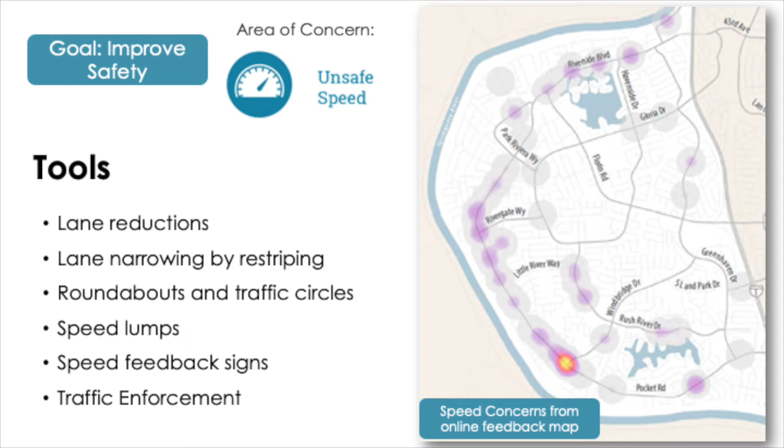I'd like to talk a bit more about lane reductions. They're one of our most effective tools to slow traffic and improve safety. The result is that drivers are less comfortable and less able to drive at high speeds. We heard from you that you've observed racing-type vehicle behavior and aggressive passing, especially on roads with 2 lanes in each direction. A lane reduction would reduce these instances of bad driver behavior and unsafe speeds.

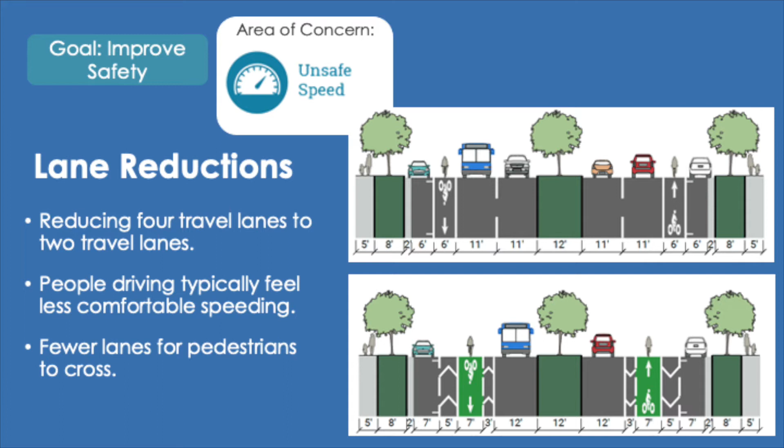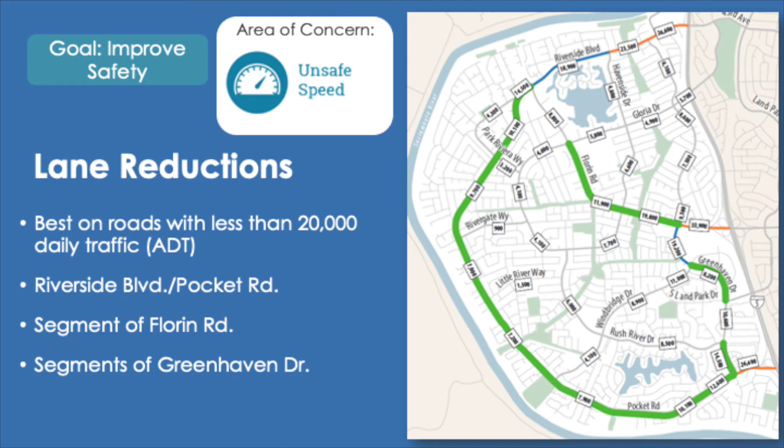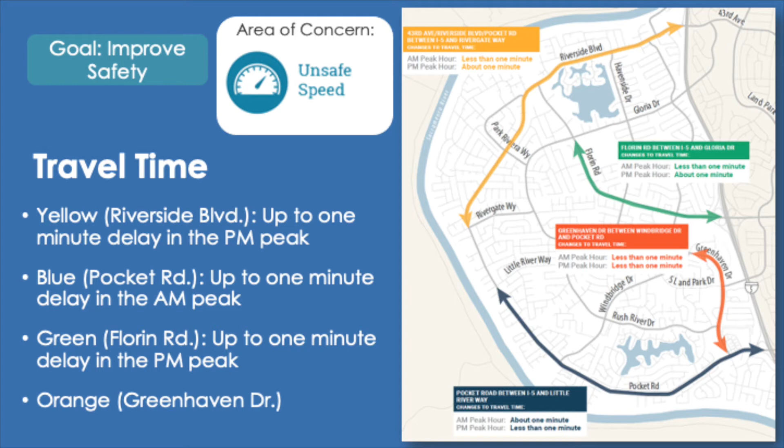You're muted, Leslie. Sorry, I muted myself for a second there.

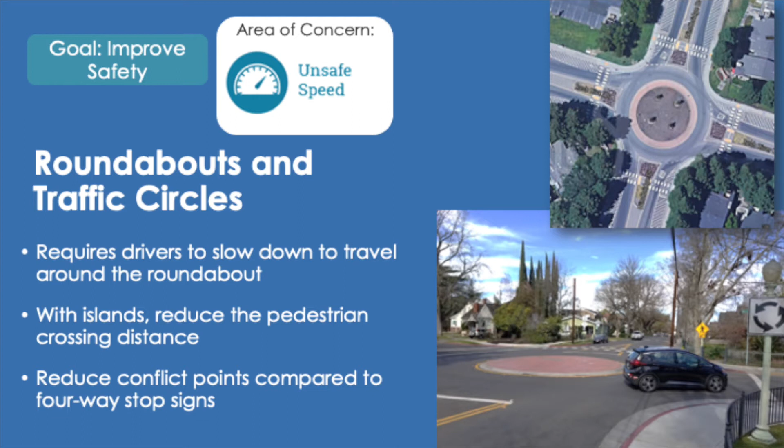One limitation to roundabouts and traffic circles is they physically require a lot of space. Shown in the lower image is a mini traffic circle similar to what we've put in other neighborhoods throughout the city of Sacramento, and similar to what would potentially be appropriate in your neighborhood as well.

Something else we know about traffic circles is that roundabouts and traffic circles work best when grouped together. We've identified two groupings where they could be used to slow speeds: on Rivergate Way, Pocket Road, and on Rush River Drive, where we have all those senior facilities. As I mentioned before, seniors are our most vulnerable neighbors, and these could reduce speeds to reduce the risk for our senior neighbors.

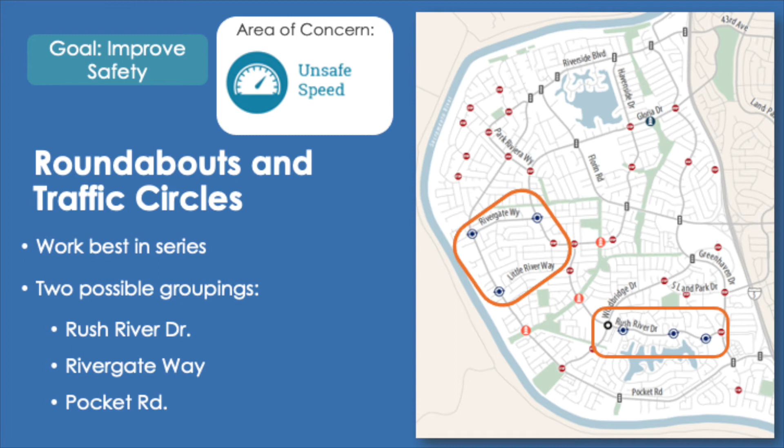Additionally, another tool we can use to improve safety by slowing drivers down is speed lumps. I'm sure you're familiar with how speed lumps work, but there are some limitations. We can only place speed lumps on two-lane residential roadways with posted speeds under 30 miles per hour.

We've identified a few locations appropriate for speed lumps around schools and where we've heard your concerns about cut-through traffic. We heard early in our outreach that cut-through traffic is a major concern, which is why we're looking at the neighborhood holistically rather than just at one road at a time.

With any speed lumps we install, we work with regional transit and the fire department to make sure their vehicles can still be accommodated and get over those bumps.

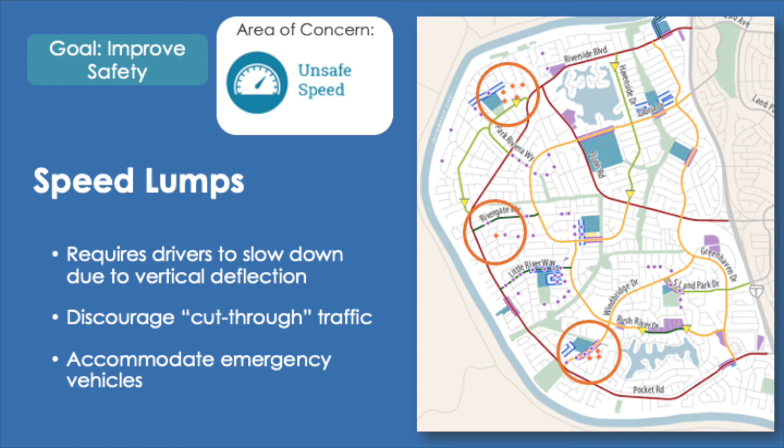Now it's time to go over tools related to improving access to destinations, especially for people walking and biking. During our community engagement, we heard that many of you would like to walk children to school or bike to the grocery store, or use active transportation more frequently for other daily trips, but right now it's not always comfortable to do so.

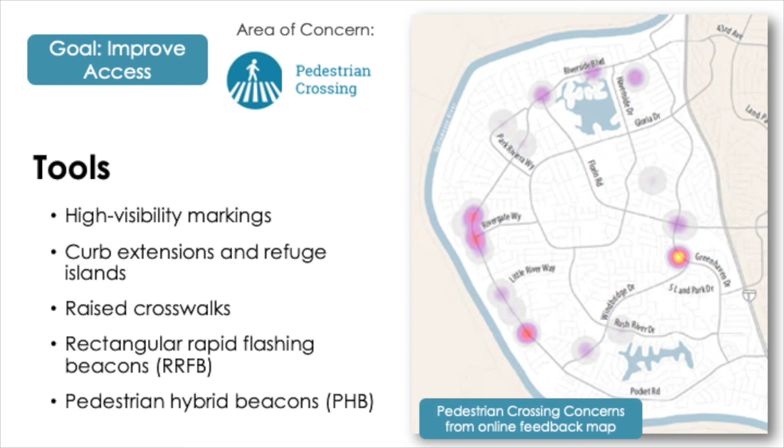Tools we have to improve crossings include high visibility crosswalk markings to make the crosswalks and the people using them stand out to drivers, curb extensions and refuge islands that shorten the distance to cross from sidewalk to sidewalk, and raised crosswalks, which are marked with paint but also raised to the height of the sidewalk, so even when no one's using it, that's a cue for motorists to slow down.

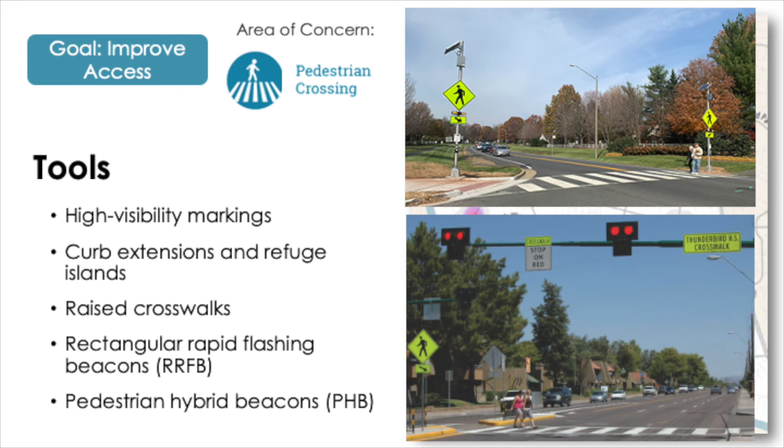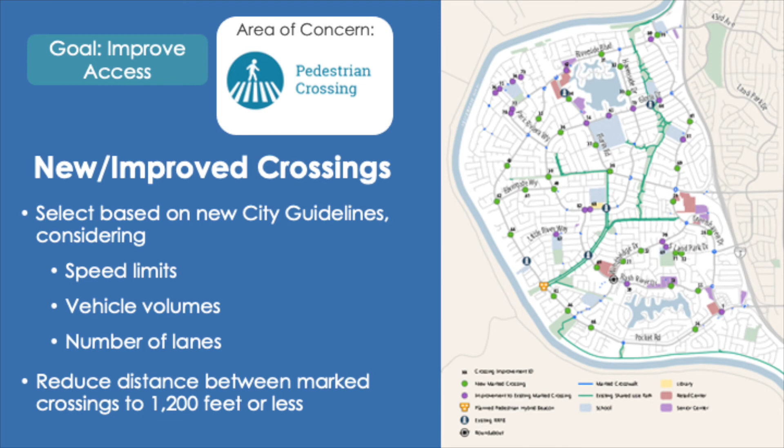To create this map, we also considered key destinations like bus stops, schools, and shopping centers. The purple dots show existing crosswalks that could be improved, and the green dots are locations for potential new crosswalks. As I mentioned before, right now in some locations it's over a mile between crossings, and ideally we'll get the distance down to 1,200 feet or less.

Another way that we can make travel more comfortable, easier, and safer to get around the neighborhood is to identify and fill gaps in the bikeway network. There are many types of bikeways with various levels of comfort for the user. The standard on-street bike lane that requires a person to ride directly adjacent to traffic isn't always comfortable, especially for children or less experienced riders.

Buffered bike lanes include a painted buffer to add space between the person on a bike and moving vehicles, and buffers can also be added on the other side of the bike lane to avoid what we call the door zone. Protected bike lanes use vertical separation, such as a post or a parked car, to add physical separation between the person on a bike and the moving vehicles.

And neighborhood bikeways and trails, I'm sure you're familiar with these. They're very well used throughout the pocket. But we did identify some gaps in that network that we noticed in our existing conditions research, and we also heard through our community outreach where those gaps are.

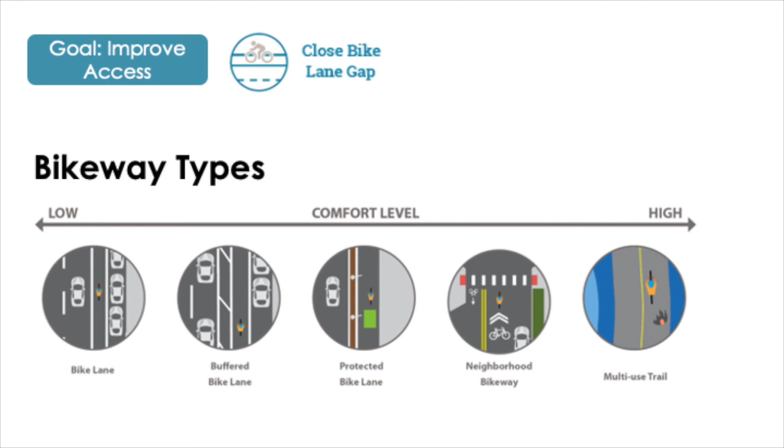Some considerations that we use are: the width of a street doesn't always include space for a buffered or a separated bikeway. The speed and number of vehicles greatly affects the comfort of a person on a bike, so lanes aren't always necessary on small residential streets. And also in areas with a lot of driveways, that vertical separation like a post or parking protected bikeway isn't always feasible because of the movements in and out of those driveways.

Here's one specific location where we learned there's a lot of challenges for people biking and walking, and that's crossing Greenhaven between Florin and Windbridge. As you'll see there, that sort of hot spot on the map shows that we heard a lot of concerns about this area. The Lake Crest Village Shopping Center is here on the east side of Greenhaven, and we heard that there's a lot of concern about people biking and walking directly across the street, mid-block, with no marked crossings, especially at the end of the canal path.

So an idea that we had to reduce this behavior is to add a traffic signal at Greenhaven and Secret River Drive, which is at the entrance to the shopping center. This way, people who are using that canal path can bike through the neighborhood and cross at the new traffic signal, or folks walking along the path or out of the neighborhood could walk up the sidewalk and cross at that traffic signal rather than running across the street mid-block, which we heard is a real concern.

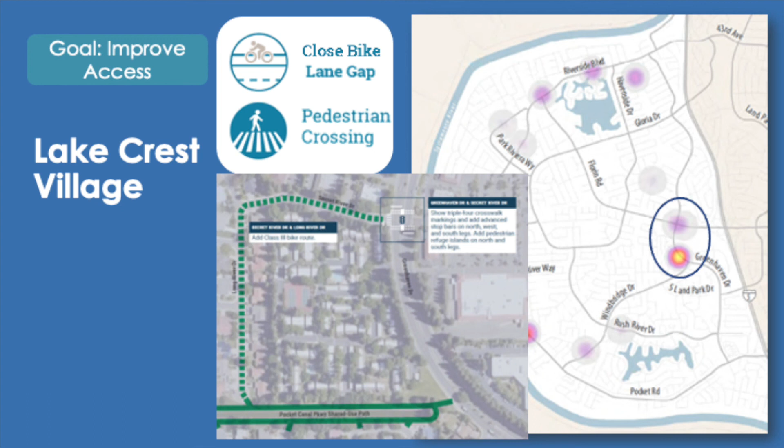There are also a number of additional ideas that we heard that don't really fall squarely into any of the categories we've talked about today, but will ultimately improve safety and mobility. Programs like these are funded in different ways, and some would require the support of schools, community groups, businesses, or other partners, but they're still important. These include educational campaigns about shared use path etiquette, bike or walk to school days, or walking school buses, but also adding lighting and wayfinding signage could really help be assets to the community and help people get around safely.

So looking at next steps, we will take your comments, as everyone has mentioned several times, for the next two weeks. We'll consider all of that input, compile it, answer additional questions, review those comments, and then we'll have a draft holistic plan. Probably late fall is a little more realistic than early fall.

And then we want to go back out to you, and as the council member mentioned, hopefully we can do that in person, maybe not, but we'll definitely keep you informed of when that plan is available, and we'll take your comments again at that time. This is a real iterative process. So once we finalize the plan, we'll bring it to City Council in early 2022. And if adopted, as everyone has said, then we can start that process of seeking funding and hopefully implementing some of the short-term items, and then identifying a path forward for the longer-term items.